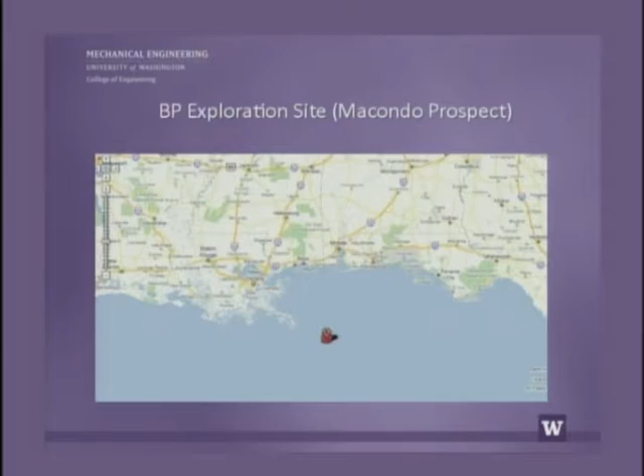And to do the exploration, and you may have seen this, they used a rig called the Deepwater Horizon. It's an offshore drilling rig that's semi-submersible, and it can also move under its own power. To get an idea of the size, it's about 112 meters wide, so it's wider than a football field. Its draft is about 23 meters, and the total height is about 97 meters. And when it's in full operation, there can be up to about 130 people on the rig itself.

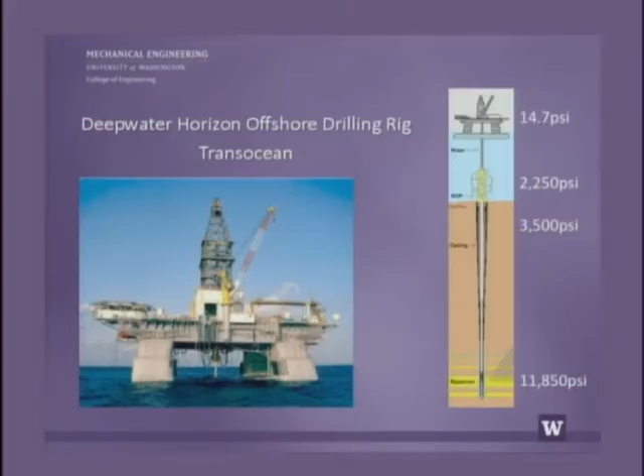And right below the blowout preventer, it's estimated the pressure was about 3,500 psi. At the ocean floor, it's about 2,250. So there's a lot of pressure drop there to drive the flow through the blowout preventer and the piping. So that's the setup.

And as everybody knows, on April 20th, there was a big explosion. It was the evening of April 20th, the explosion occurred, and then there were multiple explosions. In fact, 11 of the crew were killed, 11 out of the 126 that were on the rig at the time. So it blew out, and the fire started, and the fire was probably fed by the hydrocarbons coming up the riser, because the fire burned for about 36 hours. It just continually burned. They couldn't put it out.

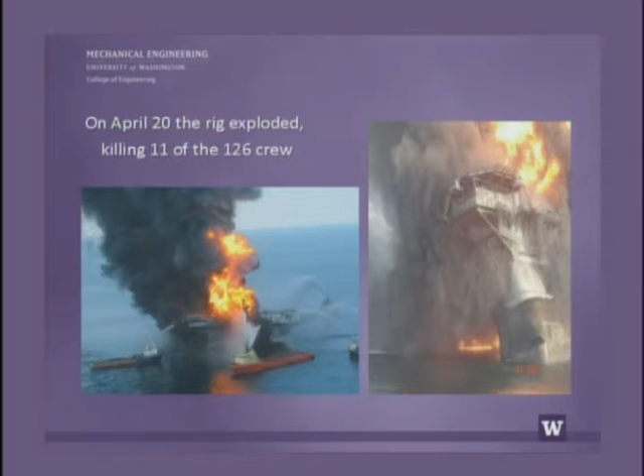And finally, the rig filled with enough water and it just sunk to the bottom of the ocean. And as it sunk, the riser went down with it. So it sunk on April 22nd, and this vehicle is down to the bottom plus the riser. And so BP went down then and started to explore what was going on there. And this is what they found after a couple days.

So this is their sketch of the riser here. And here's the wellhead right here where the BOP is. And here's the end of the riser. And they found, after a couple days using these remote operated vehicles, these ROVs, that there was a lot of oil coming out here at the top of the BOP, and then a lot coming out at the end of the riser as well.

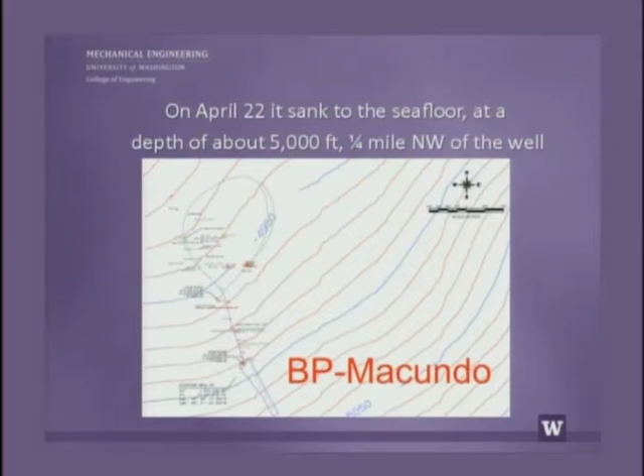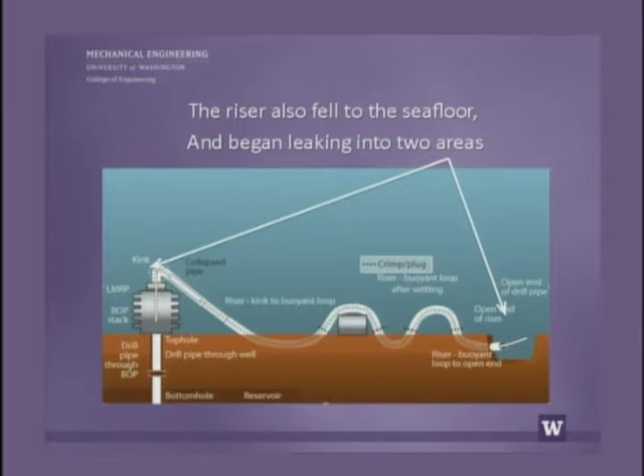And so this is kind of a cartoon of what it looked like then. So here's the ocean floor, the blowout preventer, and then this riser just bent over when the thing fell. And so there was a kink here and a lot of cracks in the kink, and so the oil and gas was coming out of that. And then this was supposed to be a mile long, and then oil was gushing out of the end here as well.

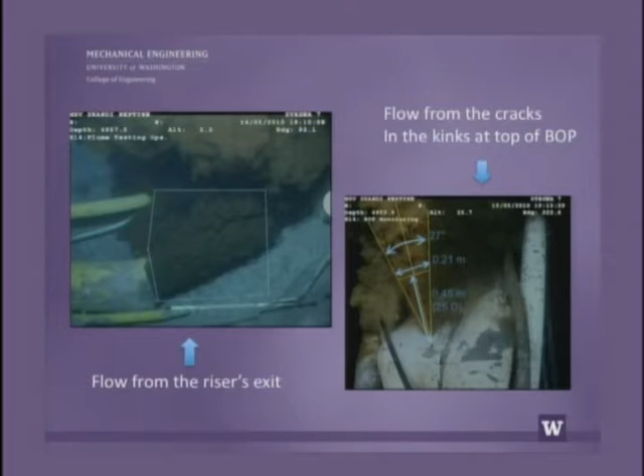And these are things that you probably saw on CNN website or various other places. This is just a frame here from one of the films. On this side, this is the flow coming out of the end of the riser, just pouring out. And then to the right is a frame from the film. Here the riser is at the top of the blowout preventer, and the riser is fallen away from you. And so you can see there's several cracks there, and oil is kind of gushing out of that as well. And the amount coming out of that was not unappreciable.

So our objective was to try to use films of this stuff to make the best estimates that we could of what the flow rates were. Now, a little bit later on, BP was trying all these different ways of shutting the thing down. And later on, what they did was they cut the riser off and just laid it on the ocean floor. And then the oil started gushing right out of the top of the BOP, at least for a couple days until they put a cap on that.

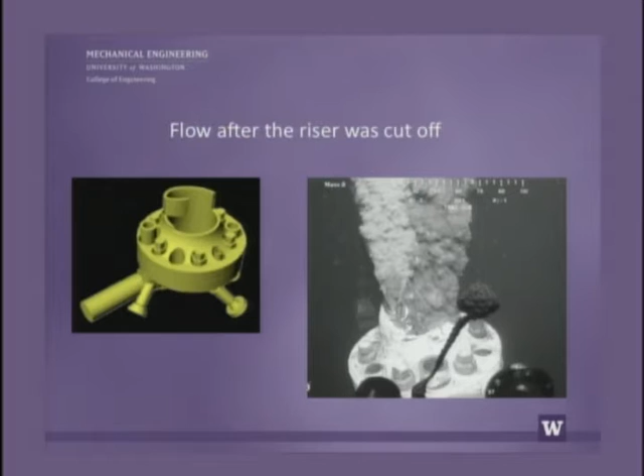So it took them a couple days to cut the riser. This is right on top of the BOP. When they finally got that cut off, then there was a flow coming up like this, and we had some videos of that as well. So we had kind of two different times where we can make measurements of what was coming out.

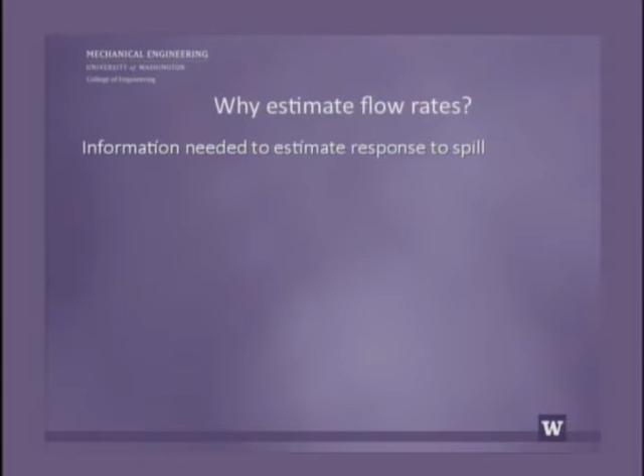Okay, so now the question comes up, and maybe this is pretty obvious to most people, but why would anyone want to make flow rate estimates? And the first reason is to help in dealing with the response to the overall spill. Like how many ships do they need at the surface, how many skimmers do they need, and all these other things dealing with the response.

The government didn't work so much on what we estimated, but they worked on worst case scenarios. And so actually before the accident occurred, BP had estimated that if the whole riser was removed, about 160,000 barrels of oil per day would be coming out. Later on, after the accident occurred and the riser and the blowout preventer stayed on, they estimated the worst case of 100,000. And those were numbers that the government used to deploy their ships and everything.

On the other hand, I think it's pretty clear that in estimating the short and long-term environmental impact, you really have to know how much oil came out. And in fact, that's where a lot of the research is going on now. People know what came to the surface. They have estimates of how much was burned off and how much evaporated and how much was skimmed. They need good estimates of how much was not at the surface.

And that's one of the main reasons to make estimates. And so you see now there's a lot of field experiments going on looking at underwater plumes and how fast they degrade, how it affects oxygen in the ocean and sea life and all.

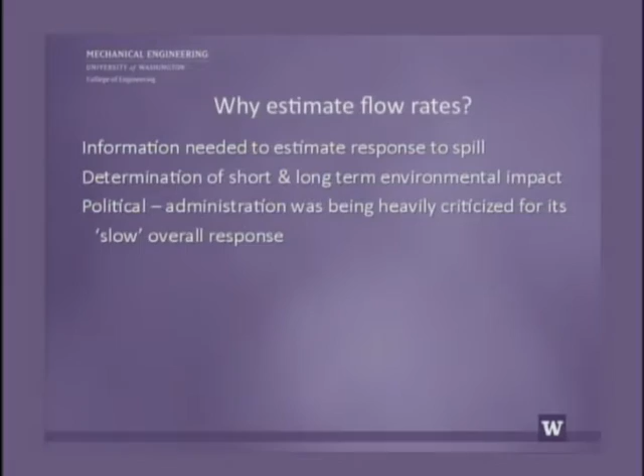So the environmental issue was important. Also, there were obvious political repercussions because the administration was being heavily criticized for kind of a slow overall response. And whether that was justified or not, they were very sensitive about that issue. And so they wanted to get the best estimates they could all the time and show that they were on top of it. But a fourth issue was legal.

And I think, as you know, almost immediately after the accident, lawsuits were starting to be initiated, from the fishing industry and from the travel industry, and you can kind of go on and on. The states were planning lawsuits, some of the local districts, counties, and the national government. A lot of lawsuits were planned and are being followed. Now, a lot of the lawsuits are based on the amount of oil spilled. That becomes important, how much was spilled.

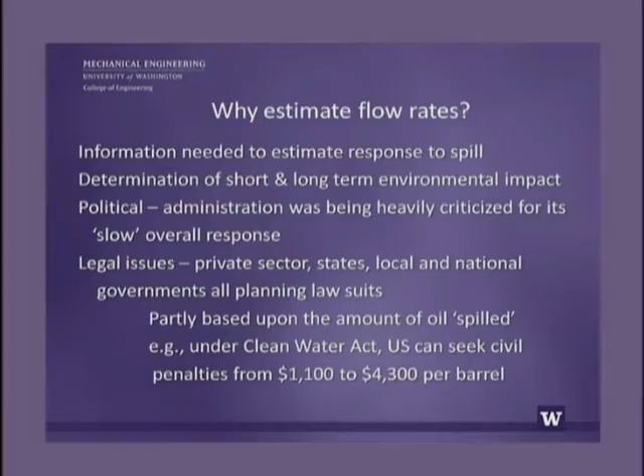And just to give one example, under the Clean Water Act, the U.S. can seek civil penalties of from $1,100 to $4,300 per barrel of oil spilled. And we'll find later on that if you take the final estimate of how much was spilled into the Gulf, multiply that by the worst case, the 4,300, you get almost $20 billion. So, I mean, the numbers are just fantastically high, and that's only for this one civil suit.

And in fact, it means that if you make a 1% error in the estimate, that's about $200 million difference. So they're numbers that people aren't normally even used to thinking about. But so the legal issues are really big. So there was interest in making estimates, and on the day that it sank, the Coast Guard made an estimate of about 8,000 barrels per day.

A barrel is 42 gallons, so this is something like 330,000 gallons per day. It's a lot. Seems like a lot. But their estimate was based upon the amount that was in the vessel itself. There was about 700,000 gallons of diesel oil in the vessel. So that was their early estimate. Now, the first day they took the probe down after the rig sank, they couldn't find any trace of oil, and they thought maybe this is going to be okay.

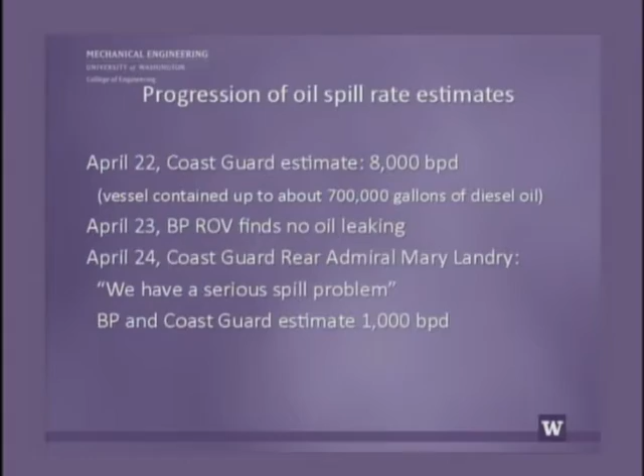But they kept looking around, and then the second day they found these two sources. And probably in the understatement of the day, Coast Guard Rear Admiral Mary Landry said they have a serious problem. Actually, at the time, the talk was more about the people that were killed and their families and about the people injured. But now people started to think, well, maybe this is a serious oil spill. And at that time, the Coast Guard and BP together estimated about 1,000 barrels per day. So that was kind of a first estimate.

Now, just a few days after the spill, NOAA, that's really NOAA in Seattle, that has a lot of responsibility for oil spills, they made a kind of a quick estimate, and they said 5,000. Although in the report that you read they said up to 10,000 or possibly more, the press picked up on the number 5,000. And so that's what people were talking about for the next couple weeks. The government says 5,000. But is it really 5,000?

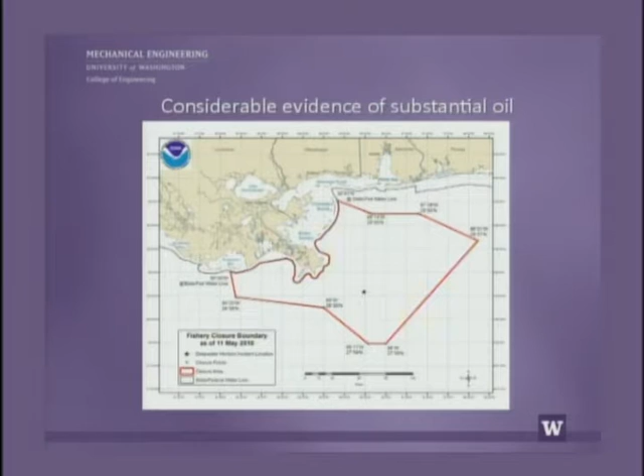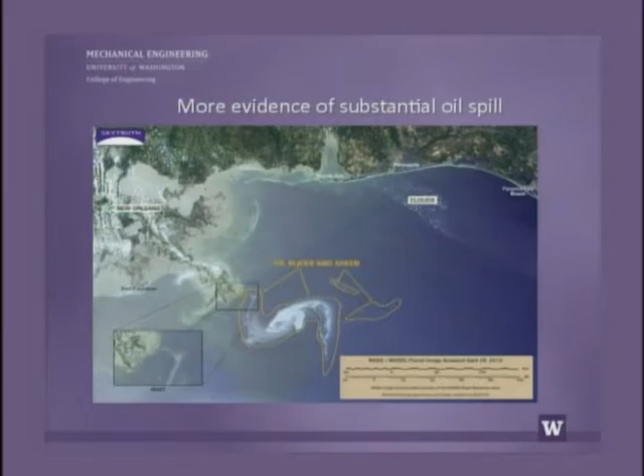And then this was done by SkyTruth, an environmental group, and the resolution of the image was very good. And so when you blow this up, show this little area here, you see that already the slick is starting to hit land there. And they made an estimate, but again, their estimate was just based upon what they could see at the surface, and it was about 20,000. So all these numbers were coming out.

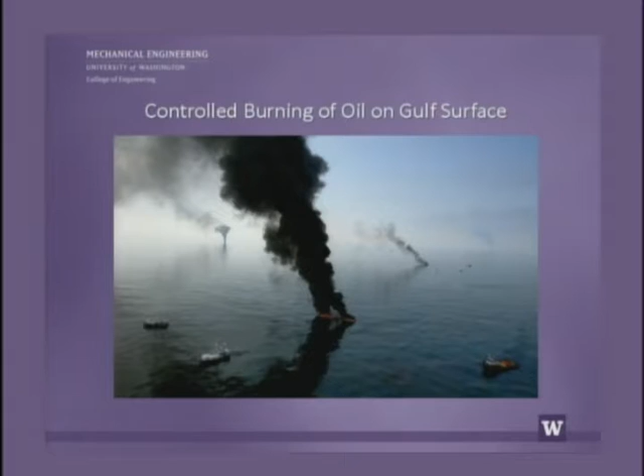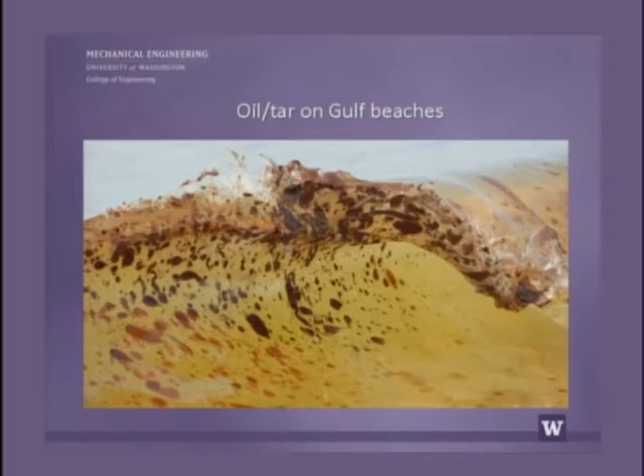There was controlled burning of oil on the surface. You know, there was water, there was oil and tar coming into the beaches, and so all of this was being reported in the news a lot. And there were estimates from the 5,000 up into the 150 to 200,000 and everything in between. The trouble was that there was very little hard evidence. All they could do was see the surface, and this thing was happening a mile down, and so there just wasn't good information on what was subsurface.

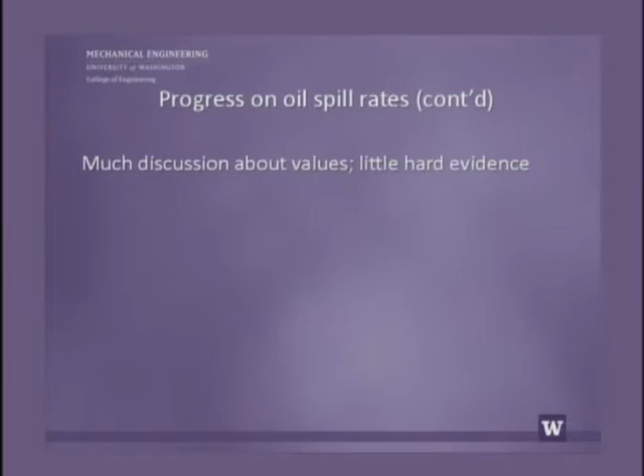But the game changer occurred on May 12th, when, for some reason that we don't understand, BP released a video of the flow coming out of the riser. And so within the next day, that was shown on PBS News, and it was put on YouTube, of course. And so now everybody is starting to have access to this. And when you watch it, it's pretty dramatic. And in particular, when a fluid dynamicist watches it, there's many people around the country that know how to work with images and use them at least to make estimates of the flow.

And it turns out that same day, when I look back at my emails, that's the day that we got into it, that Bill Lehr from NOAA in Seattle called me up and asked if I'd want to be involved. So fluid dynamicists started looking at this, and by the way, on the 13th, BP said that you couldn't use the video to make any estimates. It just wasn't possible. So the next day, a colleague, Steve Wereley at Purdue, was interviewed on NPR, and he had taken the films, used kind of the methodology that Alberto will talk about. Now, there's some problems in what he did, but he was getting 70,000, and it was clear that it was much higher than 5,000. So that kind of broke the ice in a way.

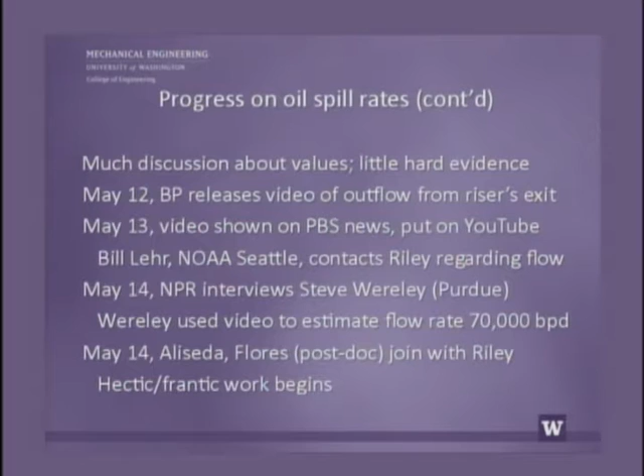And so that day, I knew that Alberto had worked on this. He had used imaging before, and he was used to the technology. So I talked to him and asked him to join me. And then we really needed help. And so Oscar Flores, who's a postdoc working with me, but on a very different problem, said he would join as well. So there were 3 of us. And so we realized this was kind of going to be a frantic month.

And the trouble was that this was right in the middle of an academic quarter. So we're teaching, doing research, and in fact, I had a trip planned to the National Center for Atmospheric Research to give a talk and talk to people there. And then I had another trip planned at the end of the quarter to go with some undergraduate students down to Johnson Space Flight Center, where they were going to do some tests on a microgravity airplane. So we had a lot of other things on the table, and Alberto had 2 trips to national meetings with graduate students. So we had more than a full plate, and we realized this was going to keep us busy. And if we did it, this was going to be weekends and nights and all of that. But we decided it sounded interesting and important, so we decided to go ahead. So I'll tell you about getting into it in a minute.

I thought it was useful to describe the structure that developed in the government in doing the response. And so ultimately, Steve Chu, the Secretary of Energy, nominally came in charge of estimating the flow rates, I think kind of on a volunteer basis. But the person running the overall response was Thad Allen, who was probably the most visible. So people probably saw him on TV and in the news a lot. He was a retired Coast Guard admiral, and here he was commander of the National Incident Management System, which is part of FEMA. And so he was in charge of the overall response to the spill, and of course estimating the flow rate was part of that. And so what Allen did was ask Marcia McNutt to be head of the flow rate group.

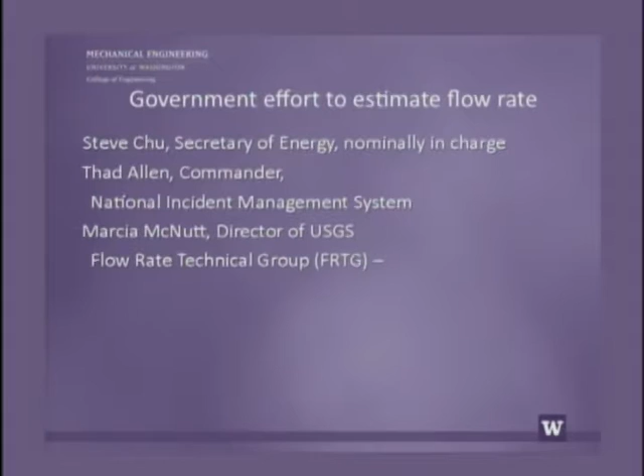The plume modeling team, which was us and some other academicians, one of them Steve Wereley, the person I mentioned, and a couple people from government labs. We were mainly using videos and this particle image velocimetry that Alberto will talk about. There was also a mass balance team that was kind of using the older methods, using airborne and remote sensing and estimating how much was burning off, how much was evaporating, and how much was skimmed up.

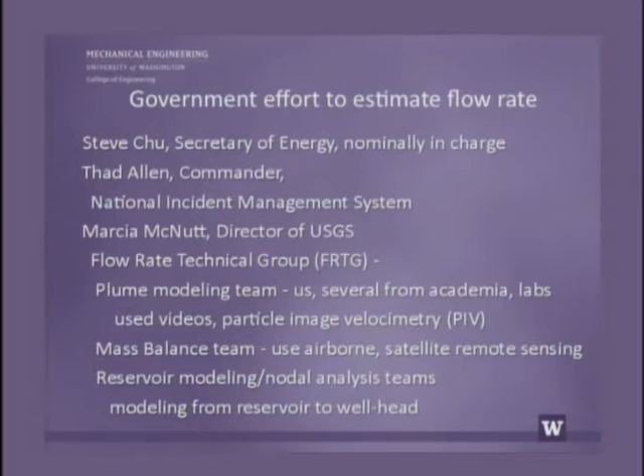The trouble was that they didn't know anything about what was subsurface, so they could only tell you what was happening on the surface, which could be useful because if you subtract that out, you might get a better idea of what's below the surface. And then there was another team doing reservoir modeling, kind of standard petroleum engineering, where they were estimating flow rates from the reservoir up to the wellhead. So there were these different groups.

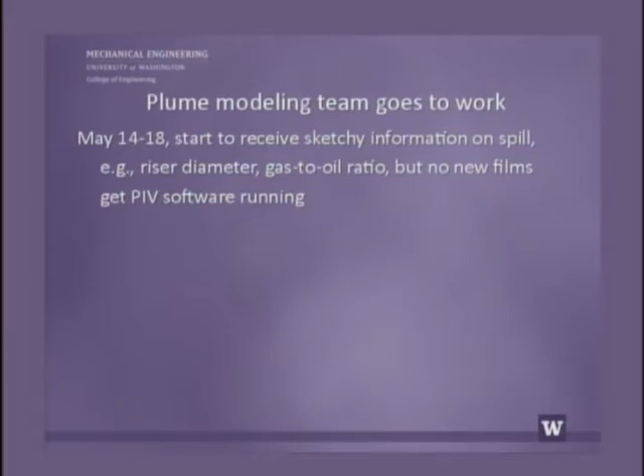And so we started working on May 14th. The trouble was we had really sketchy information. Even the riser diameter itself, it was all bent up. And then there's a pipe inside the riser, and there's cables down the riser. All that geometry wasn't clear. The gas-to-oil ratio turned out to be a problem the whole time. We weren't getting good estimates of that, and that was a key parameter.

Also, we couldn't get any films, so we had these YouTube videos, which are nice to watch the thing, but we really need high-resolution films to do what we want to do. So we got things running, and we kept asking BP, we need better films. So on the 19th, we finally got some films from BP, but they were YouTube quality also. So we had these not really good films.

And then we also joined with, it's kind of a long story, Juan Lasheras from University of California, San Diego. So there was a team of 4 of us. Juan was using similar methodology, but different codes, so it was a good way to check each other's calculations and good interaction as well. But that was like a Wednesday, and we were told by Sunday the government needed a number. And so we had this poor video and sketchy information, and we started doing what we could.

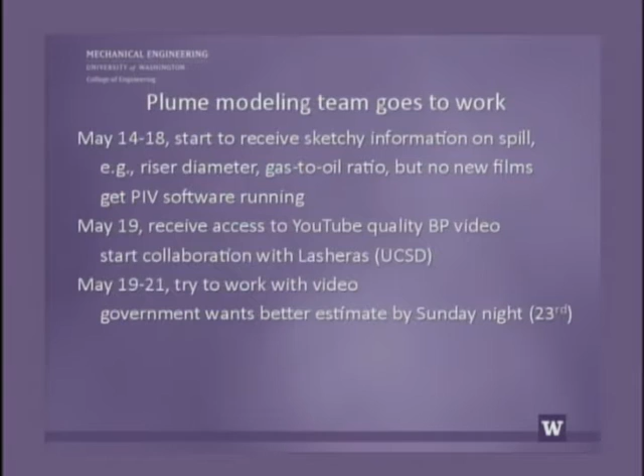And then we had a teleconference on Saturday. There were our team members, this plume team, plus a number of people from the government, and we haven't figured out who they all were. There were all these names in the beginning, they introduced themselves, and then that was it. But they were from key agencies, there was at least one representative from the White House, and there was a person from BP, who, as you might expect, wasn't really popular in the meeting.

But it turned out that he was really useful because we could tell him what we needed, like better quality films. We also needed good information on the video cameras, like frame rates, in order to use them. So he said that he would go off and do that. That was a Saturday. Then we met again the next day and discussed this more. And that's the time that Marcia became head of the overall effort.

But we couldn't say much. We had these poor quality films and sketchy information. So all we could say at the time was that we felt it was at least several times larger than 5,000, but we couldn't make any harder statement than that. But we started to get better videos, at least. These were of the flow coming out of the end of the riser. We weren't getting good videos, or videos at all, of the ones in the kink.

And so Alberto and I had a chance to see Bill Lehr at NOAA, which was really interesting, to see their setup and everything that was going on and where they were going to be bringing the films. But then we had another teleconference with our team. In fact, we were having 1 or 2 per week then as things developed.

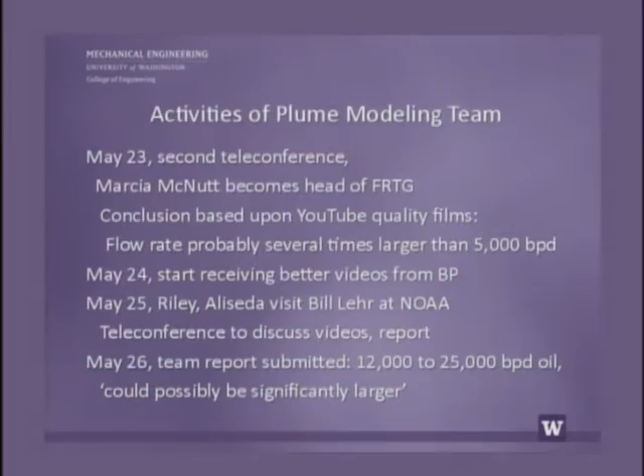And so based upon pretty sketchy information, I think we had one good quality film of maybe a half an hour or something, I can't remember how long it was. So the first thing we said was, based upon the information we have, it's probably on the lower side between 12 and 25,000, but it could be significantly larger, and that was what was in this report. So we sent that off to the Department of Interior, and they issued a press release where they took into account the other estimates. Well, the mass balance team was just looking at the surface, and their estimate was 12 to 19.

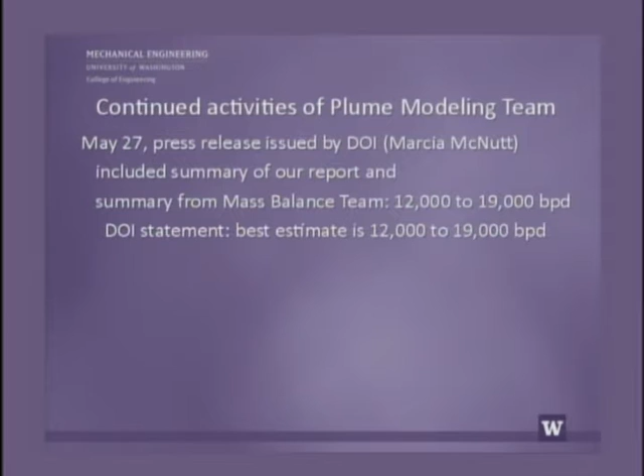And the statement that the Department of Interior put out at the time was 12 to 19. And so the press picked up on the number of 19,000. So it went from 5 to 19,000 in the press, and that's what people were talking about. So the thing that happened, though, was when the Department of Interior issued the press release, our names were on it. And so we immediately started getting contacts by all of the local press, national, and even some international press, and it just kind of continued.

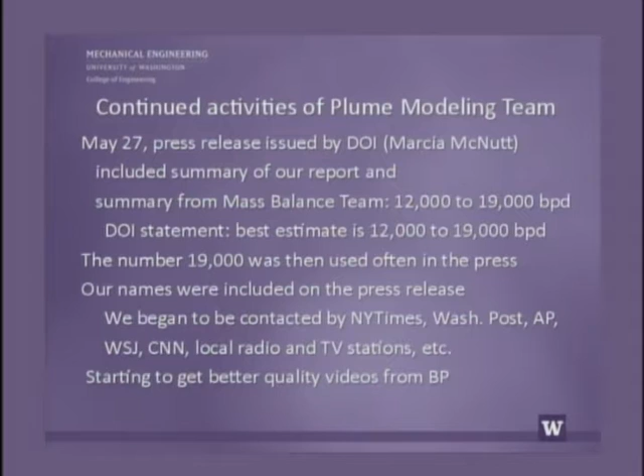But we were getting better videos, kind of gradually. They were getting better. So BP kept at it. You probably heard of the top kill and all kinds of other things that they were doing. And it was on the second and third, it took them 2 days to cut the riser away from the BOP, or from the blowout preventer, and that gave us new videos to work with. So it gave us a different way of making an estimate. Although we didn't get good videos for a while on that.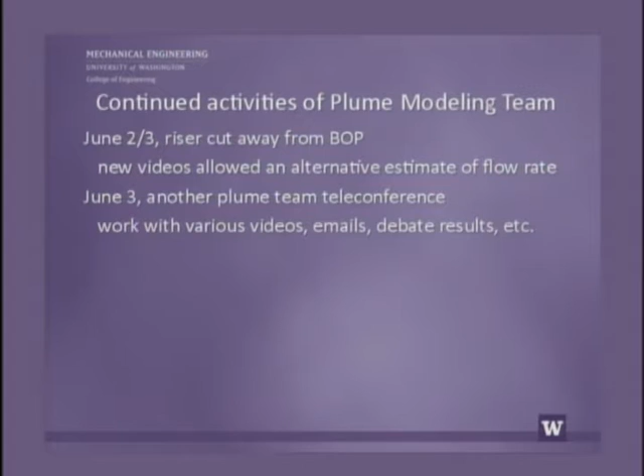So we had another conference to look at some of the other videos and at least kind of YouTube quality videos from the cutout part over the blowout preventer. And then there was a cap put on the blowout preventer after a couple days to kind of cut it off. And what they did was there was a riser on that cap, and so they started drawing oil and gases up to the surface again. At first they were drawing up about 10,000 barrels per day. Ultimately, before they took that cap off, it got up to about 25,000, so it started giving a lower bound.

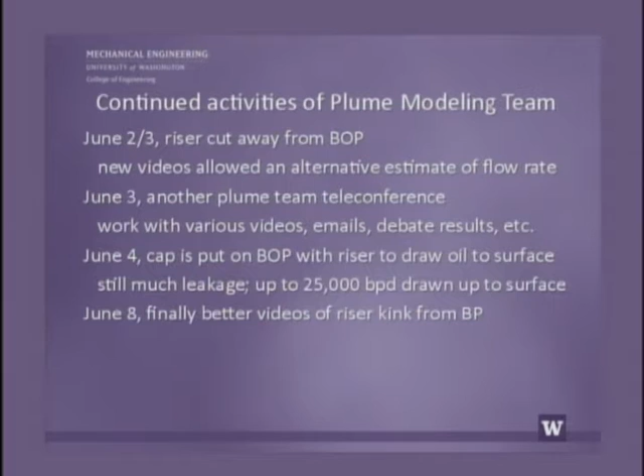Unfortunately, with that cap, and you can see because of the way the riser was cut off, it didn't fit very well, and so there was a strong flow coming out the sides or the skirts. The issue was, could that be estimated? And we finally got some better videos of the kink in the riser. As I said, there was appreciable amount coming out of that as well.

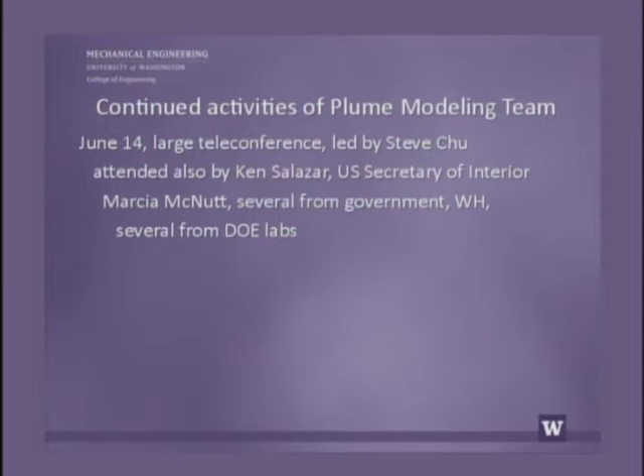So anyway, we sent it to Steve Chu, and there was an even bigger teleconference, and there were a lot of people from the government. Ken Salazar was also there, who's the Secretary of the Interior. Marcia was there. There were several people from the White House. And now there were some people from DOE labs, because when they put the cap on, they put some pressure probes in it to try to estimate the flow that was coming out of the sides of this kind of ill-fit cap. It was called a top hat at that time.

And so DOE came in with some estimates as well that turned out to be really high, but unfortunately it turned out that the pressure devices weren't working. But they got into the estimates, and I think that was very important. So they introduced their own estimates, but in this meeting that Steve Chu held, after a lot of discussion of the different methodologies, and there were also some estimates from Woods Hole, we came down to this number of 35 to 60,000, which kind of is what's held up now.

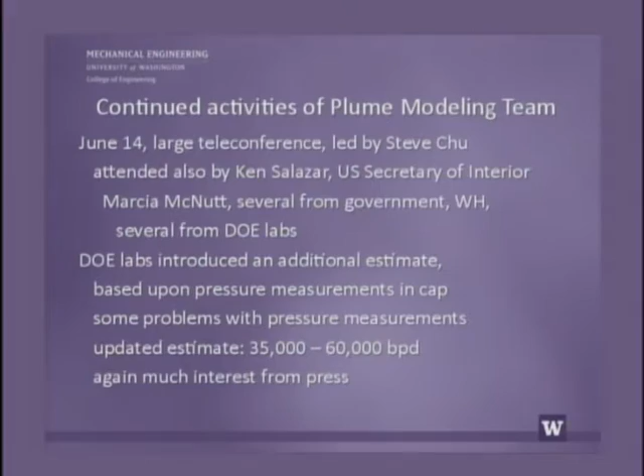And again, every time something like this happened, the press is calling and wanting to know about it, what we think about it, what happened at the meeting and all this kind of stuff. So a lot of press attention, which is not stuff that we're used to as academics.

So anyway, then we pretty much were completing the work. We introduced a draft report on the 21st with a lot of details in it. And we had two different estimates. One, when we took the flow out of the riser and the kinks together and added those together, and the other when we dealt with after the riser had been cut off. This was reviewed by some people in the universities and government labs, amended, and a final version was put in.

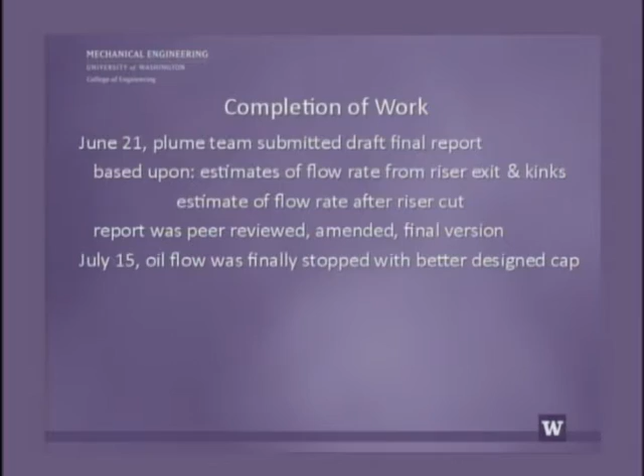Then the oil was stopped on July 15th. Now, what DOE did in stopping it was that they put a well-fit cap on, and they also put pressure devices in that did work. And so with that, they could make an independent estimate as well of what the flow rate was. So there's really the DOE estimate based upon those pressure probes and then what we're doing.

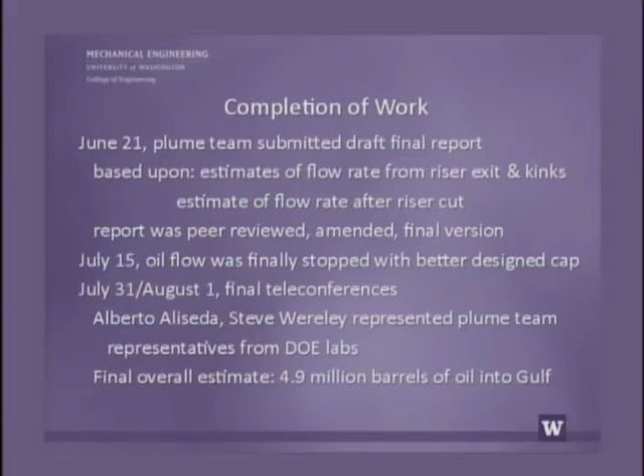And the final thing was that on Saturday and Sunday, July 31st and August 1st, there were two teleconferences, and Alberto and Steve Wereley represented our plume team. There were a number of people from DOE labs and probably some others as well. The final estimate ultimately came out at about 4.9 million barrels of oil over that period of time that had gone into the Gulf. If you multiply that by 42, it's something like 200 million gallons. So that was a number estimated that people can work with.

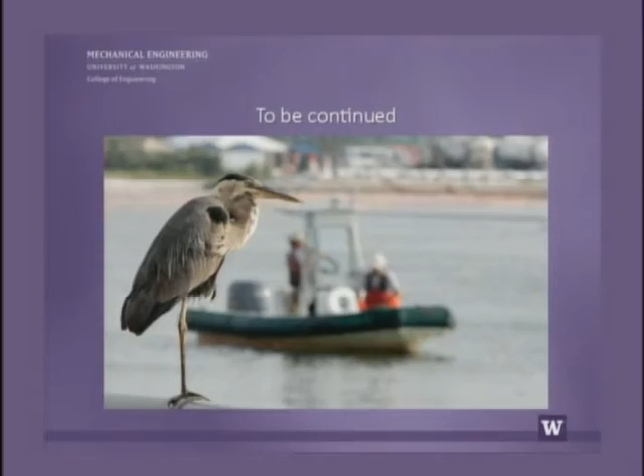So I think this is the time that Alberto takes over. What I'm going to do now is, Jim has given the background and the timeline of this. I'm going to go into a little bit more detail into the technical work that we did, what kind of calculations we did, based on what information, and our previous experience.

So being fluid mechanicians, as Jim mentioned, we're not used to press attention. In fact, we're not even used to having our own students' attention for very long. Fluid mechanics is a fairly arcane science that finds its uses pretty much everywhere, but it's mostly ignored. It's one of these things that because it works well, nobody notices. Except in this case, it didn't work quite so well.

This is a situation where two scientists with absolutely no previous experience in the oil industry got sucked into the whirlwind of doing this calculation that for the longest time, BP kept saying, no, you can't do this. It can't be done. Sorry, these videos are just for the press. So we beg to differ.

The whole thing was done here in Seattle, and it's interesting because a lot of people kept asking us, so are you going down to the Gulf? Are you going to one of these control ships? It's really puzzling because from our point of view, there's absolutely no reason. This thing is happening a mile underwater. We could be sitting on a boat in the Gulf, getting the video on our computers, exactly the same thing we can do here in Seattle. So that's one of the nice things about technology. But it's no substitute for science.

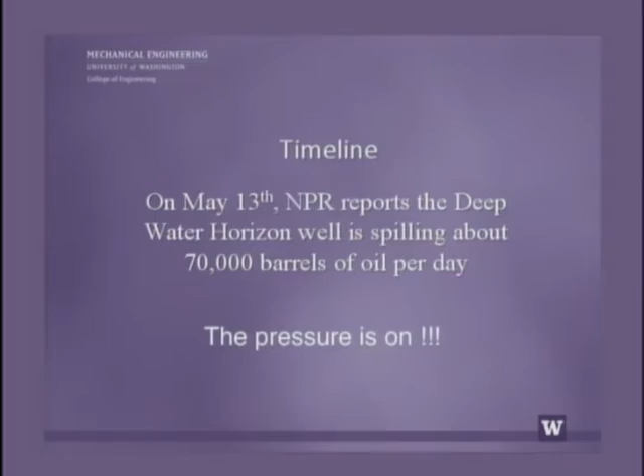Well, surprisingly, it's a big world, so there's always someone who thinks they can do that. So anyhow, somebody pulled it out of YouTube and did some quick calculation, or rather, NPR went to him, and came out with this 70,000 barrels of oil per day. And so suddenly, this became a national issue. Press was all over it. The government was suddenly feeling a lot of pressure, and so on and so forth. And so it kind of trickled down through the levels of government and onto our backs.

So suddenly, this was a matter of national urgency, and we had to drop everything we were doing and start calculating. And really, if you get down to it, it's really simple. To calculate a flow rate, this is about the hardest equation that I'm going to have in my slides, so don't worry. It's really, really simple. To calculate a flow rate is just a velocity times an area. And if you want to make it fancy, you can have all these integrals. But really, it's very simple.

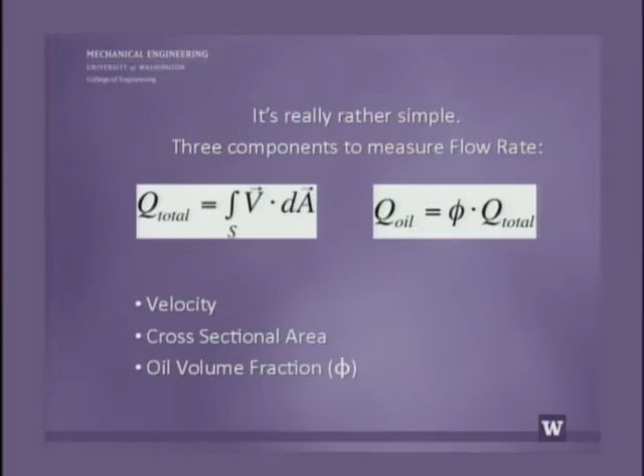Because the flow rate that you are calculating is two-phase. It has oil and gas. And for the most part, people don't care about the gas. You don't see it, so it's out of sight, out of mind. People care about the oil, which is the black, oily, thick stuff that gets attached to the rocks and the birds and so on and so forth. So what you really want to calculate is the flow rate of oil, which is the total times some volume fraction, right? So you take a certain percentage of the total flow, say 40%, and that's the barrels of oil that we get in the news. So really, there's not too much about it.

We have a technique in the lab that we use all the time. It's actually made the transition from the research lab into industry, and so this is used all the time by car manufacturers, aircraft manufacturers, medical device manufacturers, which is called particle image velocimetry. And the idea, not surprisingly, is to calculate velocity from images of particles. So how do we do that?

Well, if you take two images, and these are just idealized images, if you take two images of the flow, you take a transparent fluid, and seed it with particles that are very good light scatterers, so particles that reflect light very well. And then you illuminate the flow in some way, and typically you use a laser plane. What you're going to get is that because the fluid is transparent, it doesn't scatter any light, and so your camera doesn't see anything, so it's black.

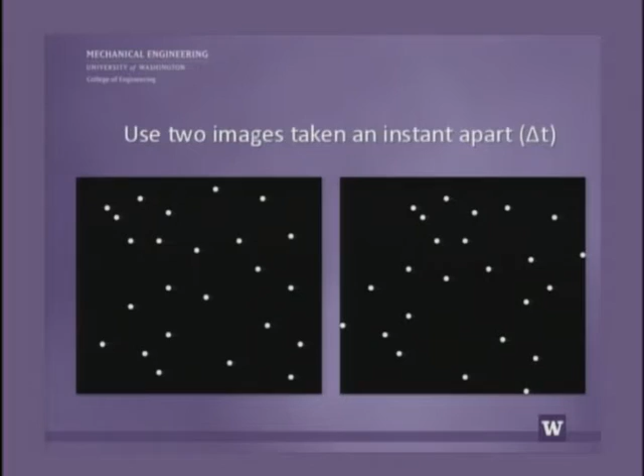And then the particles, which are very shiny, very reflective, scatter all this light, and it is captured by the camera in the form of these dots. And if you take two images at a certain small time apart from each other, you can look at the displacement of these particles in the fluid and calculate the velocity. If you want to do it really, really carefully, you don't look at just the displacement of one individual particle, because there may be a lot of error there. You may make a mistake identifying which particle in the second image this original particle is, for example.

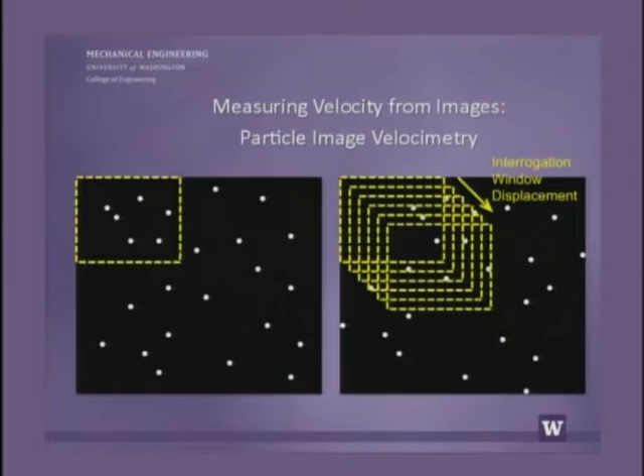You do it statistically. So you take a sub-window, which we call the interrogation window, in the original image, and then you take same size windows and essentially move around the second image. And you're looking for a box in the second image that matches the first image. And if you find that, then you have your displacement, and from the displacement, you can calculate the velocity. So obviously, we don't do this by hand. We don't sit there looking at the screen, looking at the dots. It would be very time-consuming and painful for our eyesight.

When you take a picture with your digital camera, you store the picture in your memory stick, right? And then you take the memory stick, put it in the computer, and do all kinds of things with it. That's because the sensor in the digital camera is converting the light into essentially ones and zeros, into numbers that represent the light intensity at each specific pixel. So if you take this image and you look at the information stored in this image, it can be stored as a big table, as a big matrix of numbers, where each of the numbers represents the light intensity in one of these pixels captured by the camera.

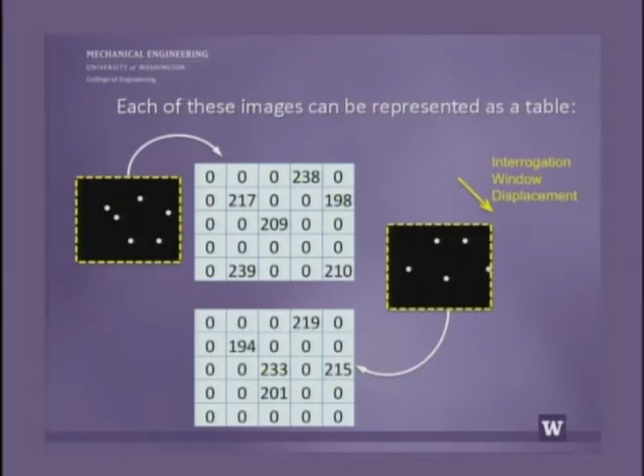So we now have these two images that correspond to a big table of numbers. We can take this table, essentially multiply it by this one, and add all the resulting numbers. It's very, very simple calculations, multiplying and adding. That's something that computers are really good at, and they can do it very fast.

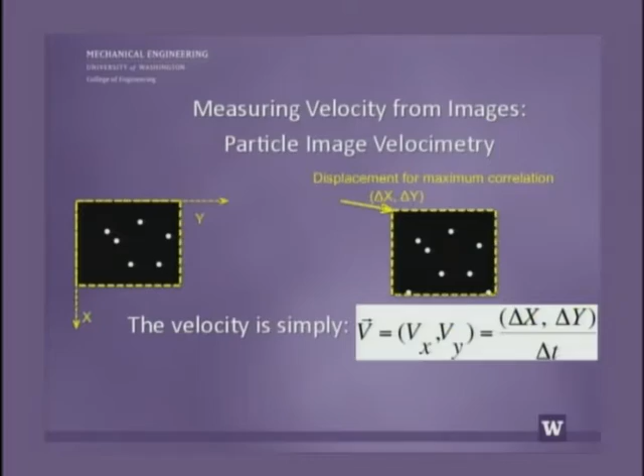So you have, in 2 dimensions, your dx and dy. If you divide it by delta t, well, that's exactly the definition of velocity, right? It's how far something has moved over a certain amount of time. So this is really what we do, and I like to think that we've gotten pretty good at it.

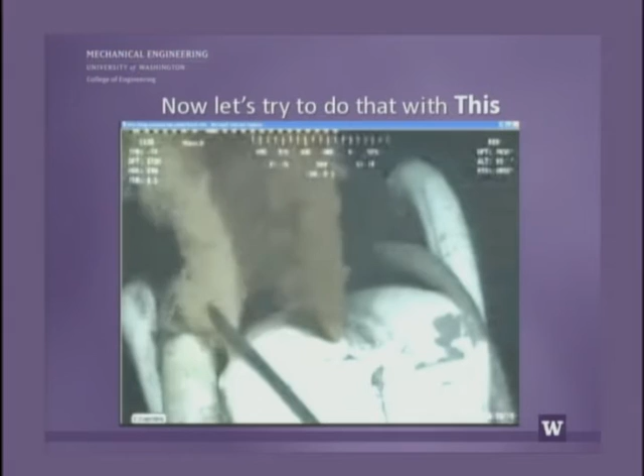But we don't really get this quality video in the lab. At least, you know, you don't get very far in the academic community if you do this. So anyway, this is a real sample. It is not blurred for your viewing pleasure. This is a real thing that we got originally from BP. And there's an interesting anecdote. This video is actually fairly good quality.

If you can't read it, neither can I, but I've spent a lot of hours looking at it, so now I know what this is. This is a Windows Internet Explorer bar, because the reason why this video is so poor quality is because this is being streamed online and then screen captured on the receiver's computer, and then made into a movie and sent to us. And we just kept scratching our heads saying, even if you're videotaping your kid's soccer game, you don't do this. Why would anybody? And there is a reason for it.

These videos were being streamed from the ship that was operating the remote operating vehicles on site. They were being streamed through satellite to the BP office in Houston. And obviously, when you stream things over satellite, you have a very narrow bandwidth. You don't have a lot of capacity for sending information. So the videos were really being kind of downgraded to send them over.

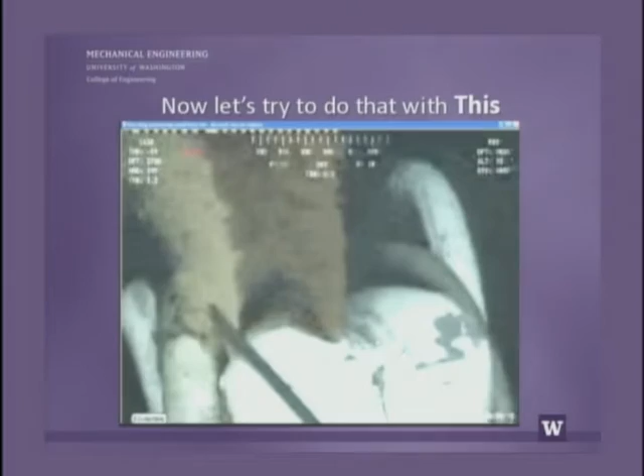And the reality is that they never thought this was going to be used for any science or any engineering of any kind. They just thought that some higher up in Houston wanted to see what it looked like. And so he had this streaming in his computer. And in fact, in some of the videos that we got, you can see the guy actually moving the mouse and minimizing this, and then you see the person's desktop, and then they start opening Word and whatnot. It's really fascinating.

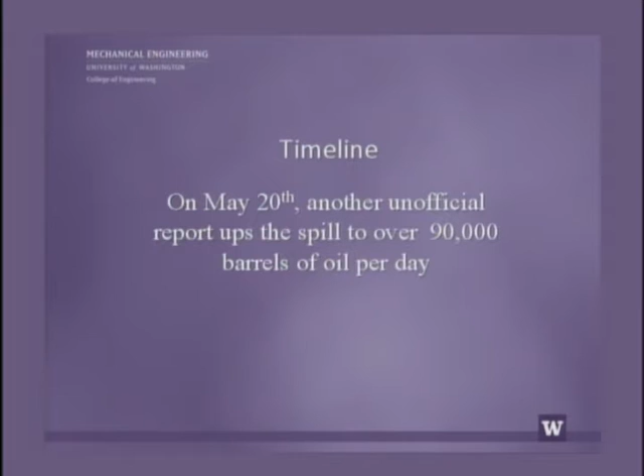So this is roughly what we had in that first week, where we got called into action. There was a lot of motion and a lot of excitement, and they wanted a number by Monday. And these are the videos that we had that Thursday. So on Saturday morning, very early, we had another conference call, and before that, somebody came on the news on Friday with an update of an even worse case scenario. And then again, the press went into overdrive, and obviously everybody felt the pressure of trying to come up with some reasonable estimates.

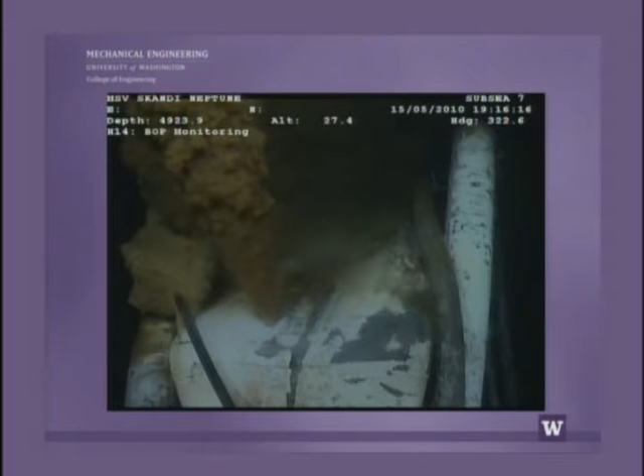So finally, we got something like this, which is a lot better video. It's still fairly poor quality. I mean, it shows up pretty well here. But if you look at it on your computer screen, you see that this is fairly old-fashioned low-resolution video, kind of what you're used to with your VHS, not even DVD quality. But this is something that we could work with. This is reasonable. This is another video.

The previous one, by the way, is this kink area where this is a 21-inch pipe that was folded over itself, and obviously it's a steel pipe, but under the weight of itself, it just crumbles, and there's all these holes where the gas-oil mixture is coming out very fast.

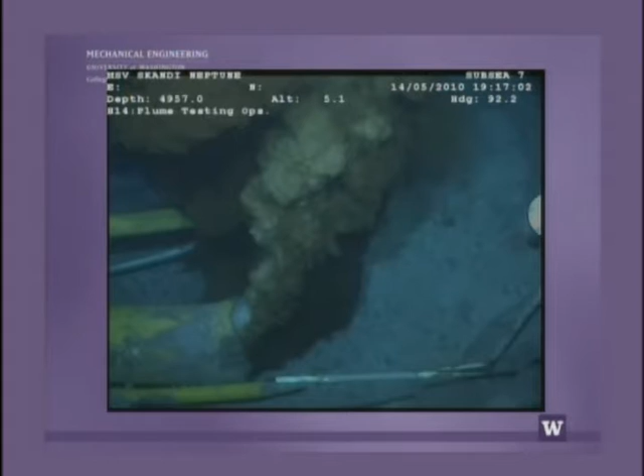This is the other region. This is the end of the riser. So that same pipe that comes out of the blowout preventer falls over, kinks over itself, and then loops for about 5,000 feet of steel tubing, and then at one point on the bottom of the Gulf, there is this end that is gulping out

oil and gas. And this is an interesting movie because you see at one point all the stuff that is coming out is very thick black. And you can see that it's coming out fairly horizontally. The density of oil is not all that different from water, so it's coming out almost horizontally through the pipe. And then you see suddenly a gasp of gas, fairly wide bubbles, that come out and they immediately rise to the surface because obviously the density of gas is so much smaller than water.

So that was one of the main problems that we had, is that this is by no means a homogeneous, steady flow of fluid. This is really a very dynamic, constantly changing mixture of gas, oil, and some seawater.

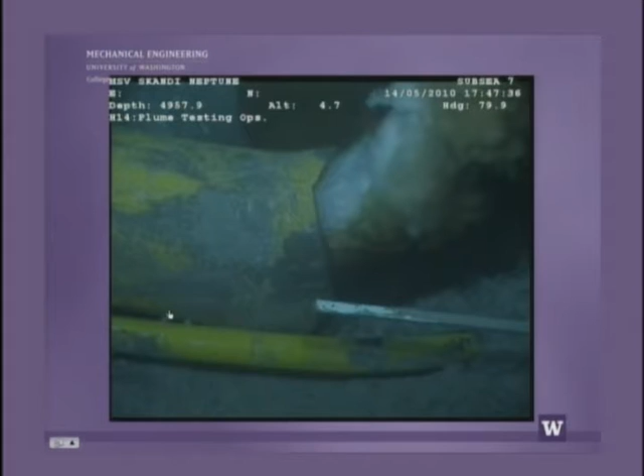This is another movie that's a close-up, and this is one of the ones that we actually used to make the measurements. And then you see this lamprey, this poor creature, just being sucked into the gusher and never to be seen again. So there's still life down there. Not a whole lot, but some.

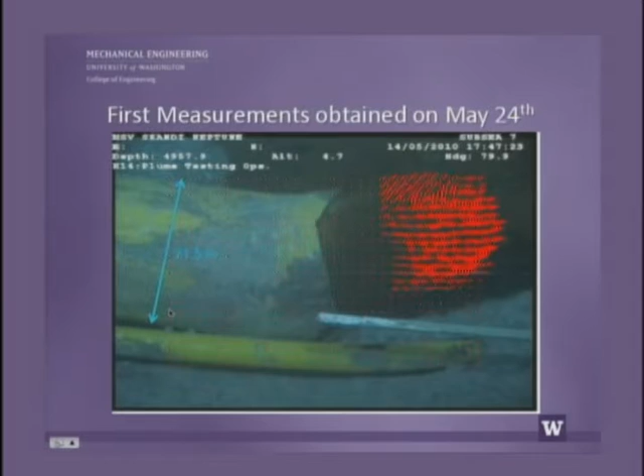So this is the first set of measurements that we took from those videos. And what you see here is just the area of interest. And you see these really little red vectors that are pointing out. And so we take all these vectors, we integrate them over the cross-sectional area, and we get a flow rate.

This is the secondary area. We have a very small hole here with this gushing mixture of oil and gas. And we have to make some approximations to get what the flow rate is, because we can't really measure down here. It's just too small. It's only maybe 8 pixels across in the hole, and the speeds are way too fast.

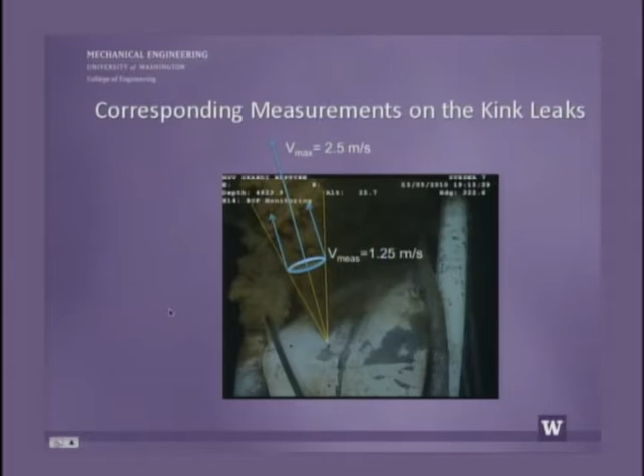So we have to make some approximations and use some turbulence theory that we always like to think has some use out there, and it actually does. So it's always encouraging. So we've gone over how we measure the velocity. But you have to remember, there are still 2 other things that we have to measure. One of them is the gas-oil ratio.

And this was an area of a lot of controversy, because this is a quantity that, depending on who you talk to, means completely different things. And so a lot of people in the oil industry who had been working with this had a completely different view of what we needed. And we kept repeating, no, that's fine, but that's not what we need.

Because they do a lot of studies when they drill these wells, studies of the thermodynamics and the composition of the gas-oil mixture. But they do them under very different conditions from the flow that was coming out. They essentially take a little sample and they raise it to the surface at constant temperature and constant pressure, and then they do different things.

And that's all fine for what they want to do, which is determine the composition and the thermodynamic properties, so that they can determine the best process to follow with that oil when they get it out of the ground and to the refinery. But it's really of little use in this estimate. So we had to come up with a way of estimating this quantity from information that was available from BP, but that was not really being used before.

And we realized that there's this arcane unit that BP was actually reporting, but without really linking it to the void fraction, which is that for every barrel of liquid oil at the surface, they were collecting 3,000 square feet. Did I say that? No. It's standard cubic feet. That's what SCF means. As I said, I'm a big fan of international units. A standard cubic foot is not my cup of tea.

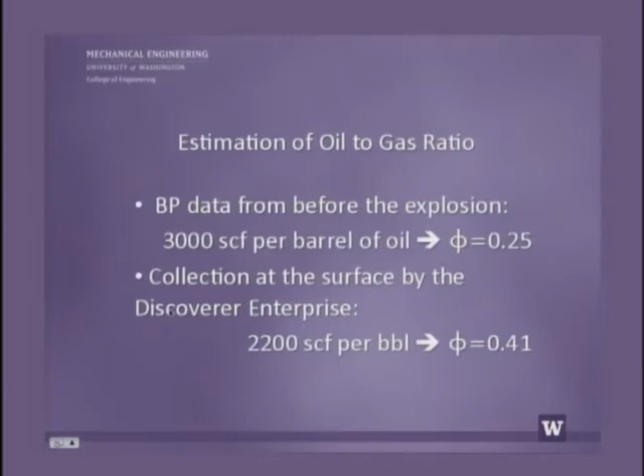Towards the end of our work, the oil that was collected at the surface after the caps were put on and everything was finally coming together, the numbers actually had changed, and they were collecting 2,200 standard cubic feet of gas per barrel of oil, which turns out to be more like 41%. So that's a 50% variation right there. There's a lot of uncertainty in all of these numbers, and it took about a month to go from this number to this number as more and more information came together. So obviously the estimates got refined quite a bit.

And finally, if you're still following me, I said we needed three numbers: a velocity, gas to oil ratio, and then an area. And the area is really something that was given by the sonar surveys from BP. There was this crumbling of the riser and this internal obstruction by the drill pipe and so on and so forth. So this is really the information that we had to work with.

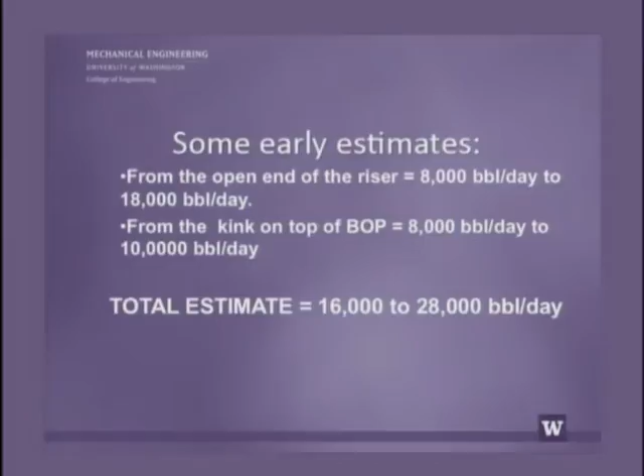So finally, we get to some numbers. With all this information, about 10 days after we actually got our hands on a decent video and we started to iron out all the details, we came out with this estimate of 16,000 to 28,000 barrels per day, based on the information that we had. And this is very important to keep in mind. All the information that we had up to this point had been provided by BP. It was all videos that were taken by BP. It was gas to oil ratio provided from samples taken before the accident by BP, and it was the cross-sectional area that was supplied to us by BP.

And so when we came out with our estimate, we made it very clear that what we were measuring was an absolute minimum. This was based on maybe 30 seconds of video. The oil had been spilling at that point for about 40 to 45 days. We had about a 30-second clip of video of not all that high quality. So we made it very clear that the numbers that we're measuring were an absolute minimum. There's absolutely no way less than this is coming out. It could be more, most likely. How much more? We don't know. So we'd rather just give an absolute minimum.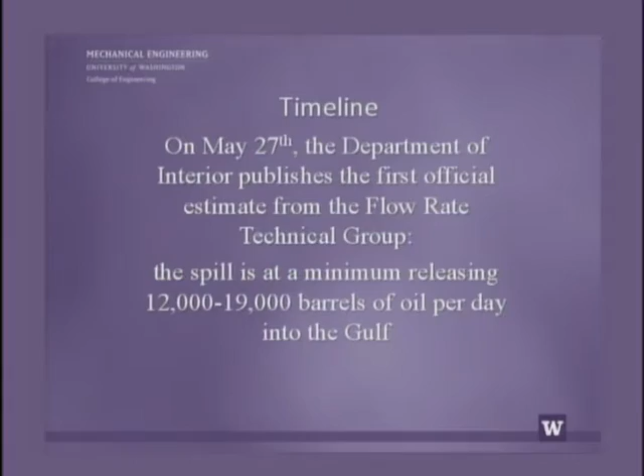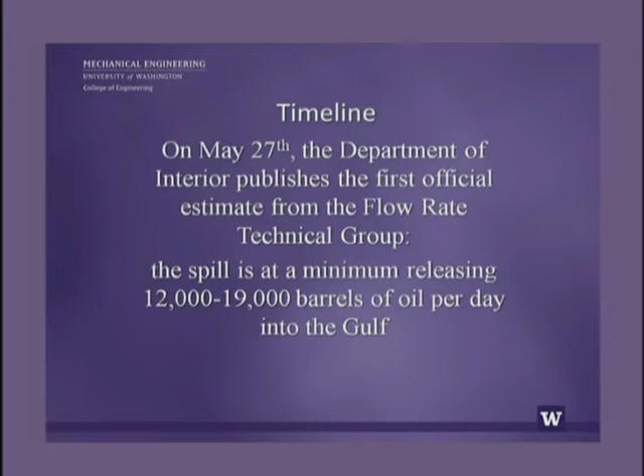So of course, that all got complicated with other estimates from other groups and the press and so on and so forth. And so it got converted into this 12 to 19,000 that Jim just mentioned. At the time, they had placed this riser insertion tube tool, which was sucking out a little bit of oil from the end of the riser, and they realized this was not going to have any significant impact. It could collect at most maybe 5,000 barrels. And so they removed that and they started the effort for top kill.

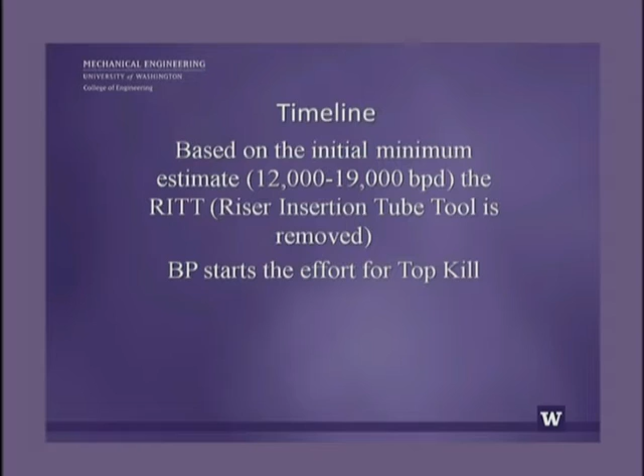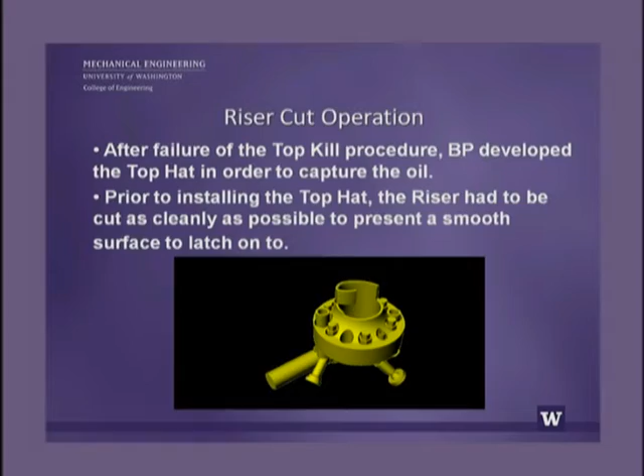So before doing the top hat, BP had to take the riser and cut it right above the BOP. And ideally, it would have been a very clean cut, and then a cap with a very good fitting could have been put in. But unfortunately, that didn't quite work so well. This is the geometry of the resulting riser. So this is the joint right on top of the BOP, the last flange, and then this is the beginning of the riser, which got mangled pretty badly there. As a result of that, this is the flow coming out.

So this video is actually high-resolution video. This is what you get if you rent a movie on Blu-ray. So this is the first time we had something that we would consider possible in our laboratory experiments. It's not quite the top of the line, but it is something acceptable as a scientific instrument. One of the differences that you see is that the oil and gas here is a lot more mixed. In the riser, you see a very clear difference between the oil and the gas because the oil and gas is flowing over about a mile of horizontal pipe, so you have plenty of time to segregate before it comes out of the end.

Here it's just coming out of the BOP in a vertical configuration, so it's coming out very, very fast and well mixed. And even there, you can see there's two clear grades of brown depending on how much oil and gas is in there. And that has to do with the fact that there's oil coming through one of the drilling pipes in there, about an 8-inch pipe. It has a different composition from what is coming out through the rest. So with this type of video, we can get really detailed information. And what I'm showing here is velocity.

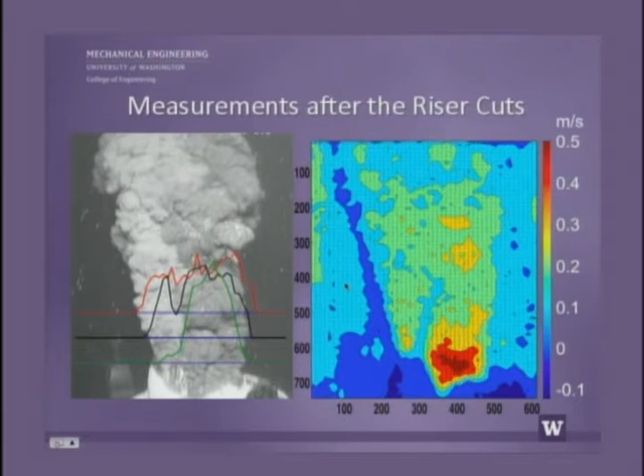Red is high velocities, blue is slow. So you can see the structure of the velocity field from these images, from the particle image velocimetry. And then if you take lines like this, you see the velocity profiles marked here, and they are slightly different. So for the first time, we get a really good estimate of the velocity.

Now, there is a little new piece of uncertainty that comes into this, and it's the fact that in the laboratory, when we use these techniques, we have complete control over the flow. So we seed the flow with these particles that we choose. And the fluid, the background fluid, is typically transparent. So we really see inside. We see what's going through the core of that pipe. Here, we're only seeing the surface. It's a completely opaque jet.

So what we are measuring here is this velocity of this outer surface of the jet that is kind of convoluted and is billowing out of the pipe. Whereas really what we need to measure the flow rate is this velocity of the core. Because right at the outlet of the pipe, we have this almost uniform velocity that we can estimate the flow rate by just the velocity of the core times the area of the pipe. But we're not measuring this, we're measuring this.

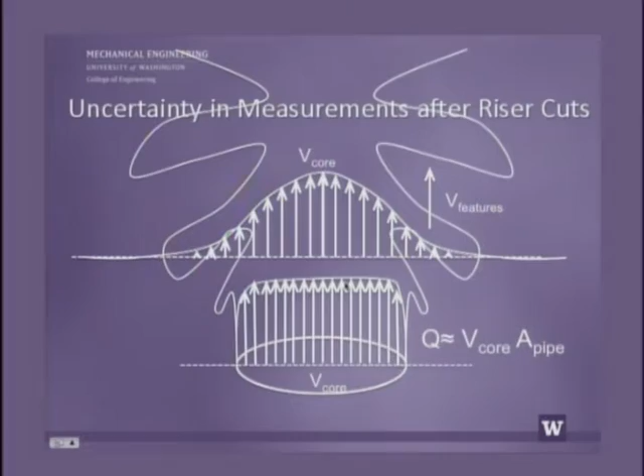So there is a whole lot of different theories that we can use to relate those two numbers. There is a lot of information in the literature that we could borrow from that tells us that for a jet of a certain fluid, let's say water, coming out in a stagnant environment of the same fluid, that ratio is about 1.6. But we don't have that.

We have a mixture of gas and oil coming out in the presence of seawater. And so it's a very, very complicated process where you have mixing going on. You have the fact that the fluid coming out is lighter, so it's going to be accelerated by buoyancy. So there's a lot of secondary effects that when they combine together, they can have a pretty significant effect.

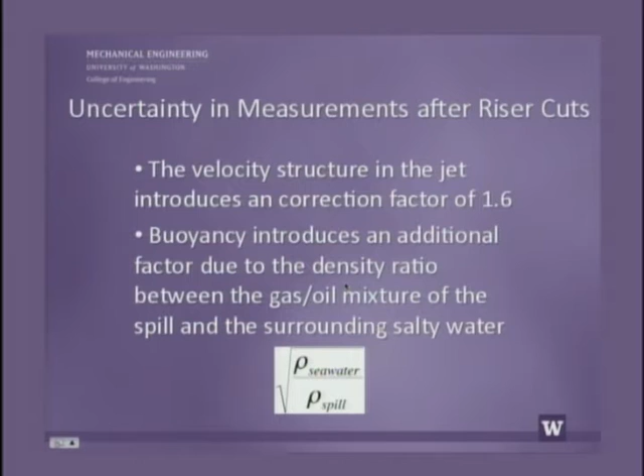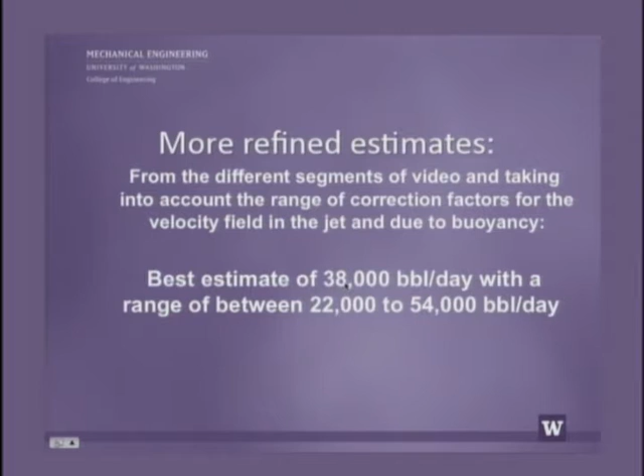So we chose to use this classical number from the literature and then modify it by the effect of the density difference between the seawater and the fluid coming out of the spill, which is a mixture of oil and gas. So with all these complicated theories put on top of the measurements, we got a best estimate of about 38,000 barrels per day with a range possibly from using different hypotheses or looking at different videos of between 22 and 54,000 barrels per day.

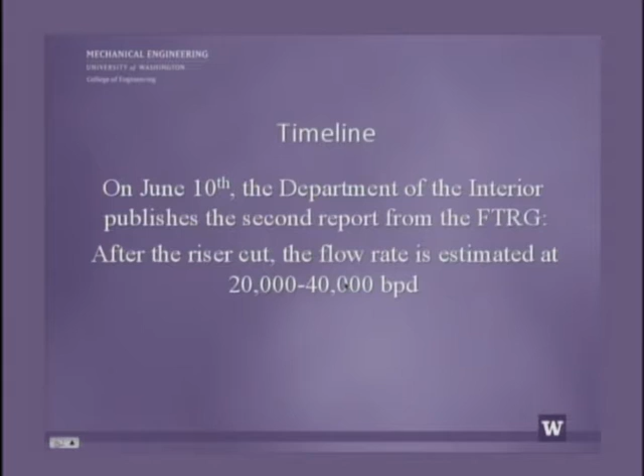Now, we are one of the groups working on this. There's other groups working for the Department of the Interior and for the Department of Energy. So we all had a big powwow together on June 14th, as Jim has mentioned, where we were supposed to iron out all of the different measurements. So what other things were people doing?

Well, there was a group from the Woods Hole Oceanographic Institution where they took standard sonar measurements that are used in field oceanography commonly, and they mounted them on one of the ROVs that BP was operating out of their site. And essentially the ADCP is a system that measures the velocity of the water. And then the imaging sonar essentially looks across and looks at where is the perimeter of the gas-oil mixture and what is outside, which is water. And so again, you have a velocity and an area. You multiply that together, and you have flow rate.

Unfortunately, there's a lot of assumptions because these two instruments can't measure in the same point. And so you have a cross-sectional area in one place and a velocity at a completely different place. And you have to bring them together and kind of fudge them together. And so there's a lot of assumptions that go in there and raise the uncertainty. And the other thing is, again, you have the problem of the oil to gas ratio, which you haven't measured there. So there's again a lot of uncertainty.

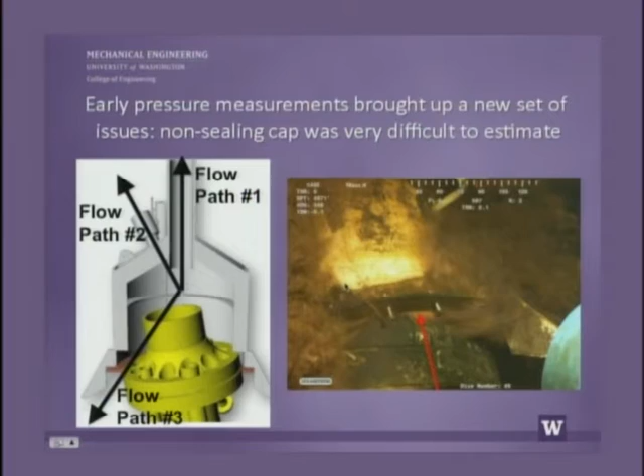Unfortunately, this is not a simple flow of air. What you have in here is a mixture of oil and gas. And the other thing is you have pretty good control over what this geometry is because you've manufactured it. You have very poor information about what this geometry is because this is essentially a leak. If you knew what it was, then you'd have made the cap so that it didn't leak.

So if you really want to do a quick and dirty calculation, you convert this into an electrical analog where you have pressure for the voltage. So you have a voltage difference, a pressure difference. That drives a flow. In the electrical analog, that would be the electrical intensity. And then you have a hydraulic resistance for each of these three flow paths, which is a resistance, right? You know the resistance and you know the pressures, you can calculate these Qs.

Unfortunately, as I said, R1 is fairly well known because this is a tube that you have manufactured. R2 is a vent that you also have manufactured, and you can test it at the surface and get some estimates. But R3 is the hydraulic resistance over this very complicated geometry of the leak. And so obviously that's going to impact the calculations quite a bit. So again, another reasonable thing to try, but has its own set of problems.

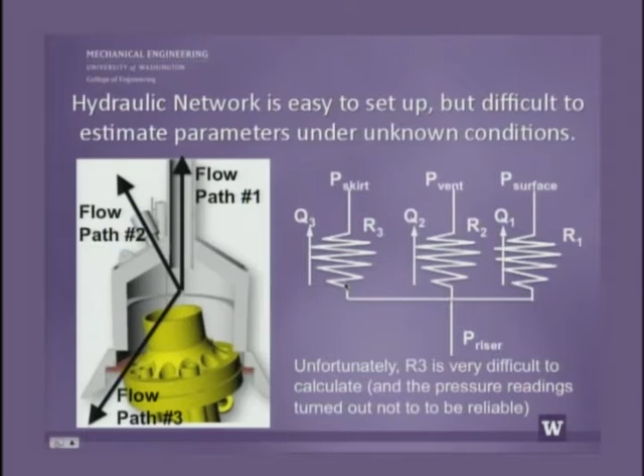So we all hashed out all the numbers together, and after quite a bit of back and forth, we came out with this estimate of 35,000 to 60,000. And the idea behind this was helping the response. The question at the time was, BP was going to start capturing the oil on the surface, and they needed to know how much oil was going to be collected to mobilize the capturing ships and then the tankers to bring it back to shore. And so the question was, well, do we need 2 risers or 3 risers? Do we need 2 tankers or 5 tankers? So that was kind of the rationale for this.

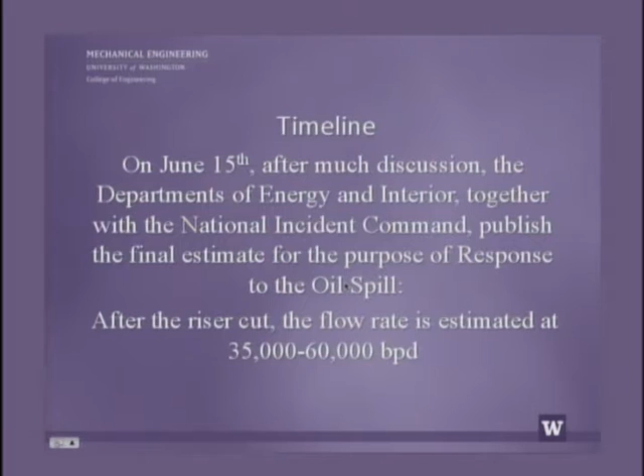And obviously, there's always a safety margin where you want to err on the safe side. But you want to know what kind of numbers you are working with. So that was the goal of this. Just to finish the story, our involvement after that point started to decay, we started to go into more writing reports, documenting everything that we had done. Once the sealing cap was put on July 15th, the oil stopped coming, and so we're really out of business because there was no more oil flow to measure.

But we did have a last conference call where the goal was to produce a final estimate. And since our measurements had been so instrumental throughout this period of about 6 weeks in estimating the flow at each step, before the other groups could catch up and start doing all the calculations based on the reservoir and the actual flow inside the well and the integrity of the well and so on and so forth, we were asked to participate in this.

Eventually, the final flow rate was estimated at 53,000 barrels per day, and this was based on some measurements that were made on July 15th, the day that the sealing cap was put on. So the moment that you put this sealing cap, there's no leakage through the bottom, and you start to close the valves and record the pressure as you close the valve, then you have a fully engineered problem where you know all the parameters, and you can finally calculate things. And of course, that was the day that they closed the oil. If they could have done that before, there'd be no need to measure the flow.

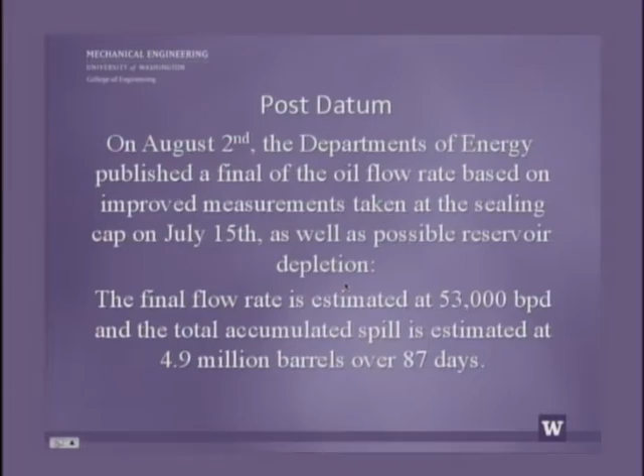And so eventually, if you take that number and multiply it, estimating a little bit of a decay over time because of the reservoir depletion, the fact that the oil is coming out, the pressure in the reservoir is going down slightly over time, they finally estimated that over the 87 days of the spill, there were 4.9 million barrels that came out. So that's kind of the corollary to our work there.